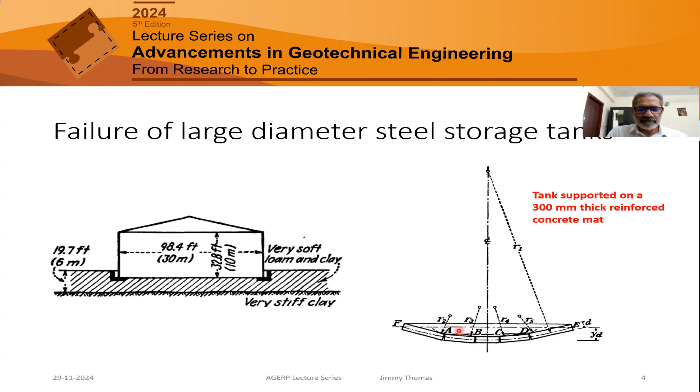Then after my masters, I did my first job. It was actually a precast piling project. They used to have precast piles which were driven, each segment about 10 meters long, for a multi-story building. The project was in a city called Kochi on the coast of the Arabian Sea. Here we have very thick deposits of soft clay, the upper maybe 10-20 meters very soft clay, then firm clay. Then at a depth of about 40 to 60 meters below ground level, there is a layer of very dense sand. So most of the multi-story buildings are supported on piles embedded in this dense sand layer.

So here, each pile is a segment of 10 meters length. It is driven with a drop hammer - there is a hammer of 4 tons weight, which is raised by around 0.5 to 1 meter and dropped. Then what happened? There were a large number of piles to be installed, and the project was running behind schedule.

Then the contractor came with a suggestion: why don't we try and speed up the driving? He said, look, the upper 10-20 meters is very soft clay, and normally we use a 0.5 to 1 meter drop height, because if you drop from a larger height, there is a possibility that piles may be damaged. So since the upper strata is very soft, why don't we use a larger height, say a drop height of 2 meters, 2.5 meters? Since the piles are being driven through soft clay, the soil resistance is less and the piles will not be damaged.

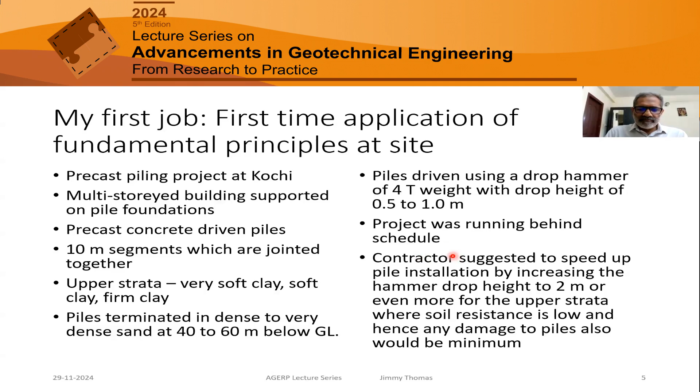But fortunately for me, I had a copy of this wonderful book, Foundation Engineering by Peck, Hanson, Thornburn, one of the classic books, where he described the process of pile driving. Nowadays most of us are aware about pile dynamics, but I am talking about something like 40 years ago. We did not have that kind of knowledge, particularly in India.

When the hammer impacts the pile, the impact travels as a stress wave down the length of the pile, as a compression wave - stresses travel longitudinally as waves. If the soil at the pile tip is hard, the wave gets reflected as a compressive wave - so always it is compression. But if the soil at the pile tip is very soft, that means if the resistance is too low, the wave may reflect as tension. In that process, if the pile experiences tension, the pile may crack. So our common sense or intuitive feeling that if the soil is soft, nothing will happen to the pile, is not correct. In fact, it is the reverse.

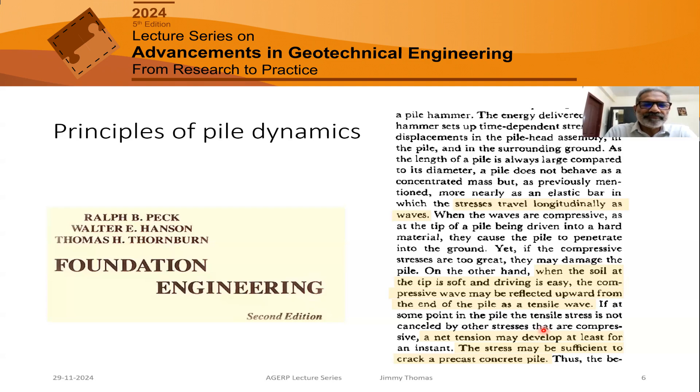I want to discuss one project which has some interesting lessons. Sometimes we have embankments constructed on soft clay, and it is common practice to use one-dimensional consolidation theory to predict the settlement.

Unfortunately, somehow people were not aware, or the budget was not sufficient to carry out ground improvement. Ideally we should have done ground improvement so that settlements are minimized, but here unfortunately nothing was done.

The client was a bit concerned - why is it settling? How much more settlement may occur? Is there an issue for the stability of the structure? So it was decided to carry out some investigation, and I was associated with that as a consultant.

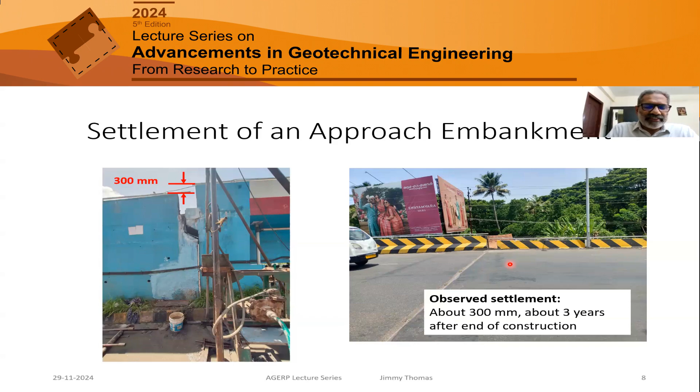Two boreholes were drilled on both sides of the approach. Here we can see at the top there is some fill and clay sand, then there is a thick, almost 12-meter thick layer of soft clay with SPT N value 2. After that it is stiff to very stiff to hard soils, then sand, etc.

Here also more or less similar - from 5.5 to 16 meters a layer of very soft clay. So by looking at it itself, we get the feeling that the settlement must have been due to the consolidation of this soft clay layer.

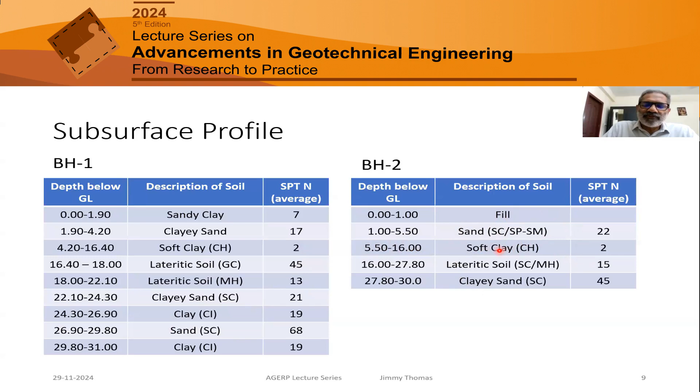From the boreholes, we did some consolidation tests. All the data was there, and we tried a settlement calculation.

Here I could realize there are some issues. One is the plan of the approach embankment - length is something like 105 meters, width is 24 meters, and there are reinforced concrete retaining walls on 3 sides. The maximum height is here, so the maximum settlement has occurred here. We have to calculate the settlement along this edge.

So is one-dimensional approach valid here? That was one doubt.

Then second is the loading - if you look at the approach, here the height is minimum and here the height is maximum. It's more like a triangular loading. So how do we manage the stress distribution?

Another question which came to mind is - the boreholes have been drilled close to this approach embankment, so the clay would have been already partially consolidated due to the stresses imposed by this embankment. So how will it affect the consolidation characteristics?

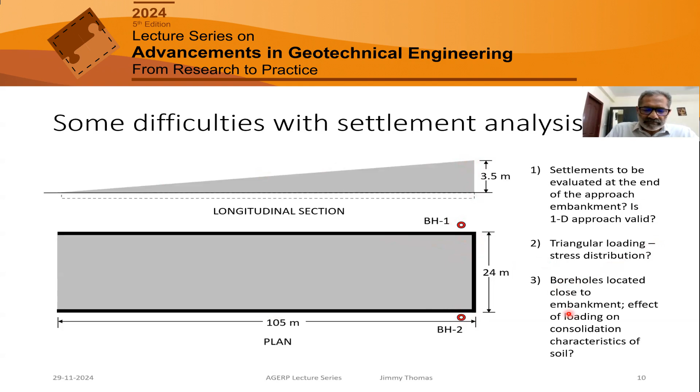Sometimes we learn much about the one-dimensional consolidation theory - all the textbooks speak about that. But sometimes, under what field conditions does one-dimensional compression actually occur?

One book has explained it very nicely - Soil Mechanics by Perloff and Baron. It's also a very old book, now I think it's not available. But when I was doing my PhD at IIT Kanpur, this book was in the library, and when I was reading through that, I found this passage. At that time, it made a very deep impression on me.

He explains very nicely under what field conditions we can apply one-dimensional consolidation theory. Sometimes we forget - whether it is a footing or a raft or embankment, we always apply one-dimensional compression theory, which is not always correct. In this case, where we have to calculate the settlement at the edge of the embankment, it is not clearly one-dimensional.

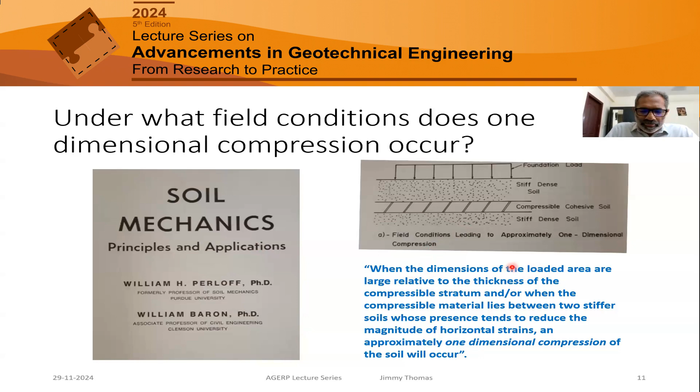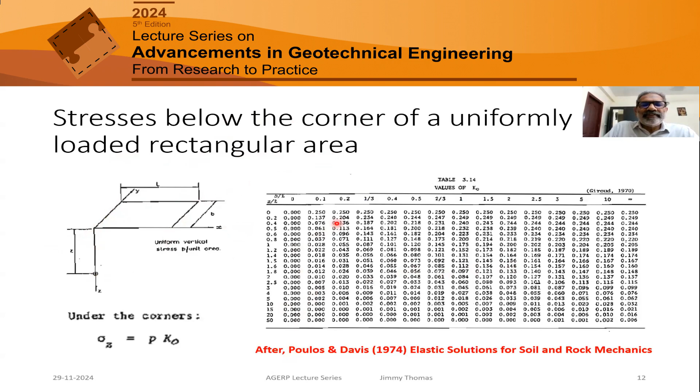Now the second part, how to calculate the stresses below the triangular loading. The book by Poulos and Davis has a lot of solutions for this. It has an equation for stresses below the corner of a uniformly loaded rectangular area. If there is a rectangular loaded area with length L and width B, and at depth Z below, it has coefficients from which we can calculate the stresses.

So what I decided: we have an approach length of 105 meters, height here is 0, height here is 3.5 meters. So I decided to divide it into 7 rectangular areas. Suppose I want to find the stress below this corner. Loaded area 1 has a length of 105 meters, width of 24 meters, and height of 0.5 meters. That gives the vertical stress.

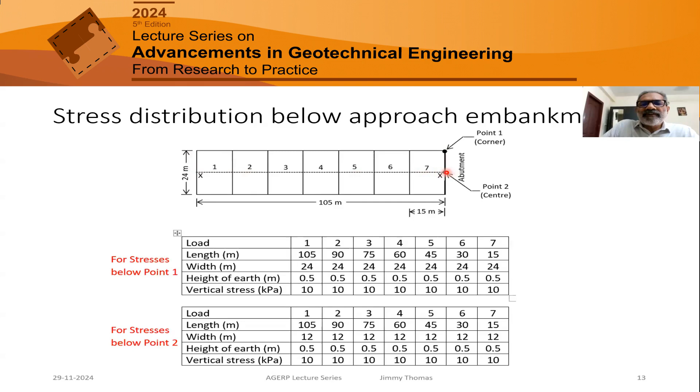Then loaded area 2 is from here to here, and so on I divided it up. Using those charts, we can find the stresses below this point. Now at this center also, I wanted to calculate the settlement, so here we consider half width. Then get the settlement, stresses below this rectangle of half width, then multiply by 2, which gives the stress below this section.

Secondly, the consolidation properties. We had about 6 undisturbed samples. Unfortunately the sampling practices were not of very high quality, because normally we have budget constraints and a tendering system whereby the company with the lowest quote gets the job. So unfortunately, in many areas, in routine jobs, the quality of sampling is not of a very high order. We have to manage with what is available.

We had 3 undisturbed samples from each borehole, then 4 samples from the upper very soft clay and 2 from the lower clay. Based on this data, these consolidation parameters were finalized.

Earlier I posed a question: what is the effect of the embankment loading on the consolidation properties? It's clear that some consolidation must have occurred, but for the calculation of settlement we have to assume that the embankment was on the undisturbed soil, then calculate settlement. So we assume the soil to be normally consolidated, and the pre-consolidation pressures were taken accordingly.

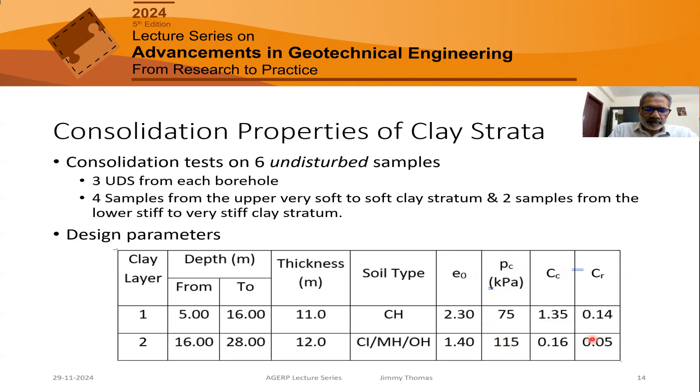The settlements were calculated at point 1 and point 2, the immediate settlement using elastic theory and the undrained modulus. Settlement here will be more because stresses are more. Please remember, the situation is not actually one dimensional, but we still used one dimensional theory because that is a very simple method, and going for more sophisticated methods would have been difficult.

So this is the total settlement. Then we have a rigid reinforced concrete wall. This would be the settlement if the embankment was completely flexible, but here it is not like that, since there are RCC retaining walls also. So we took the average settlement: average primary consolidation settlement 540 mm and average immediate settlement 90 mm.

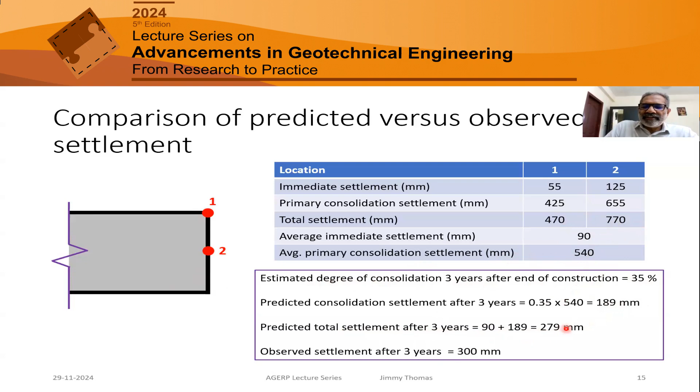Based on the CV data, the estimated degree of consolidation was 35%. So the average primary consolidation settlement is 540 into 0.35, estimated as 189 — that is the consolidation settlement at the end of 3 years. So predicted total settlement after 3 years is the immediate plus this consolidation, around 279. This matches reasonably well with the observed settlement after 3 years.

Then the client also wanted to monitor the displacements, to what extent — he was worried about what happened. So displacement monitoring was carried out for about 1 year, starting 3 years after construction, and continuing for another year.

On both sides of the retaining wall, the maximum average settlement near the abutment, where the height is maximum, was 44 mm. Near the middle, where the height is moderate, it is 37 mm. Towards the end, where the height is minimum, it is 10 mm. So a clear pattern is there: where the height is more, settlement is more, as we'd expect. On the other side, left-hand side and right-hand side differ — one side settles more.

Lateral displacements were also monitored, mostly longitudinal. Ideally we don't expect the approach to move longitudinally — there's no reason for it to move. But what happened was, readings were taken every month, and for almost 8 readings the lateral and longitudinal displacements were zero. Only the last two readings indicated some small displacement. It could possibly be an error.

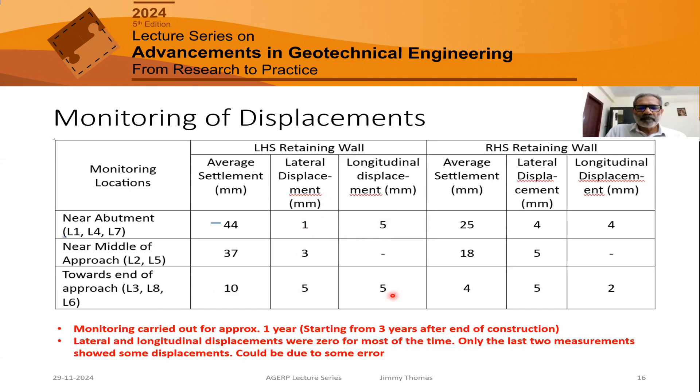So from the displacement monitoring, we could make some inferences. One is the lateral displacements were negligible, suggesting there is no risk of instability or failure. If there was a bearing capacity failure or global failure, we should expect more lateral displacements. Whereas here it is primarily vertical.

The magnitude of settlements is related to the height of the approach embankment, which is as we expect, because our hypothesis is that the settlements are due to consolidation of the soft clay layer. So where the load is more, settlement should be more.

Then settlement of the one side retaining wall was appreciably more than the other. So if you look at the CC data, compression index, that one side has got higher CC. To some extent, this could be the reason.

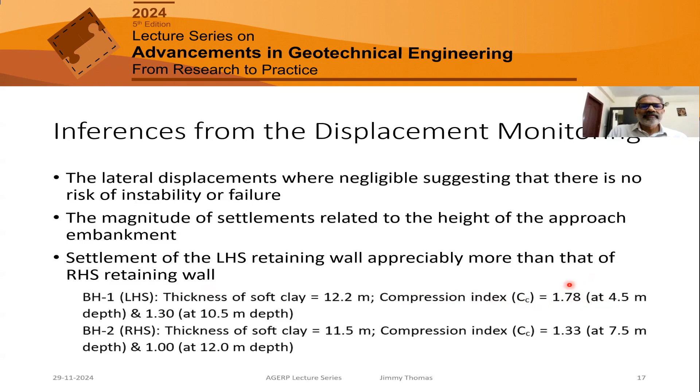Then we tried to predict the settlement after 4 years. So again, the process was repeated. From 3 to 4 years, during 1 year, what was the prediction? The prediction was something like 37 mm. Average observed settlement was around 35 mm. So that also tallies.

So now we may get a feeling that, come on, we are able to predict this reasonably accurately, and we may have a feeling of satisfaction. But there is a catch, actually. I'll come to that.

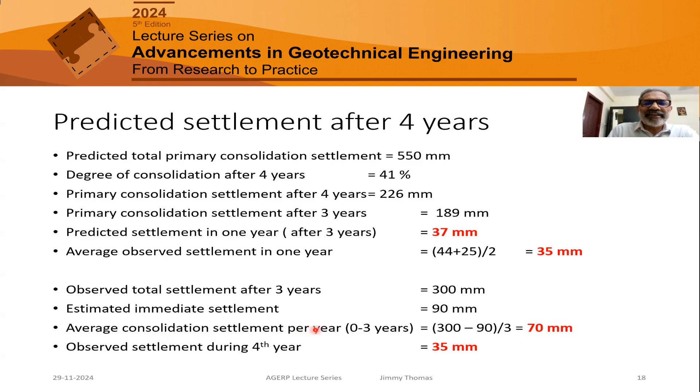Then, based on this monitoring, we made the following recommendations to the client. There is a reasonable match between predicted and observed settlement, which validates the hypothesis that the observed settlement is due to the consolidation of the soft clay.

Then deformation of the foundation strata is predominantly vertical, lateral displacements are negligible. Then the rate of settlement is indicated to decrease with time, which is what we expect if it is consolidation - the rate of settlement should decrease with time. There is no indication of instability or bearing capacity failure.

So the client's primary concern is whether there is a safety issue. Is there a risk of failure? Or should they take some immediate action? Based on our findings, there was no issue regarding stability of the retaining structures or the approach, but periodic maintenance has to be carried out.

Otherwise, when there is a differential settlement between the structure and the approach, the road quality suffers - people driving on the road will not be very happy. So that maintenance has to be done. That's all that is required.

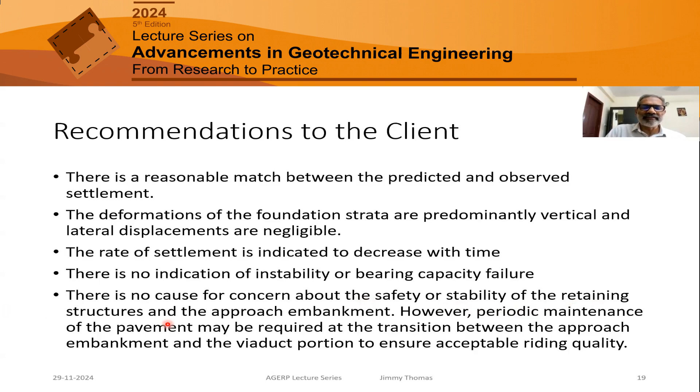Now, I was talking about the match between prediction and observation, and I told you there is a catch here. There was a very wonderful paper by Lambe - in fact it was his Rankine lecture, entitled 'Predictions in Soil Engineering,' which came out in 1973.

He classifies different types of prediction, like A, B, B1, C, C1. A is before the event - if we made a prediction before the approach was constructed, that would have been a Class A prediction, which is very, very challenging.

But what we made here was after the event. We knew that the approach had settled 300 mm. So based on that only, naturally, what do we do?

We sort of find - here's Lambe's warning, he says: however, one must be suspicious when an author uses type-C1 predictions to prove that any prediction technique is correct. So what we do is, when we do the settlement calculation, we know that we have to match that 300 mm somehow.

Normally we have a lot of parameters - we have CC, we have pre-consolidation pressure, we have e0. So we tend to fine tune the data so that the predicted value matches with the observed value. So are we cheating?

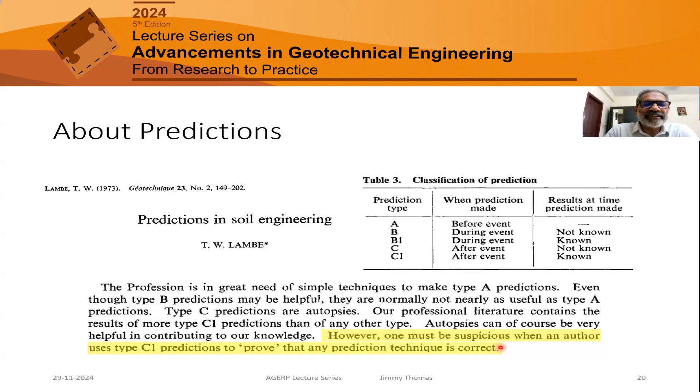Now I will come to some geotechnical design dilemmas. One of the fundamental tasks of a geotechnical engineer is: he goes to the ground, he sees a geomaterial. So the first question we have to ask is whether it is a soil, a rock, or an intermediate geomaterial, meaning materials intermediate between soil and rock, called IGMs.

Then if it is a soil, we ask, is it a sand or a clay? Sometimes it is obvious. If it is a pure sand classifying as SP or SW, we know it's a sand. And if it is a pure clay, we know it's a clay. But sometimes a material consists of 60% sand and 40% fines. Is it a sand or a clay?

We may classify it based on standards, which say if the fines are more than a certain percentage, we classify it as a clay or a sand. But how does the soil actually behave? Just because we classify it as a sand, does it behave like a sand? This is another question.

Another fundamental, the most fundamental question is: we are aware of drained and undrained conditions. We study this, but where do we use drained and where do we use undrained? Many practicing engineers want clarity on this.

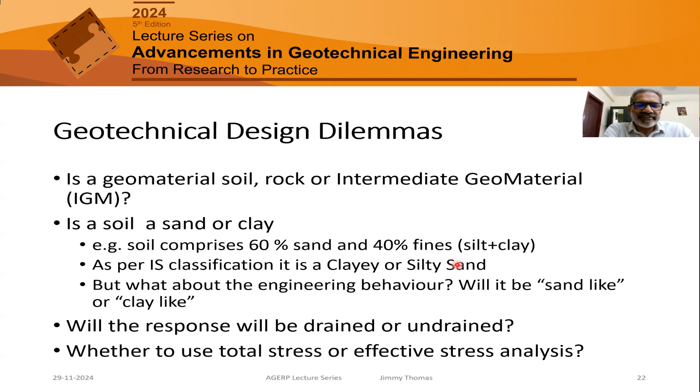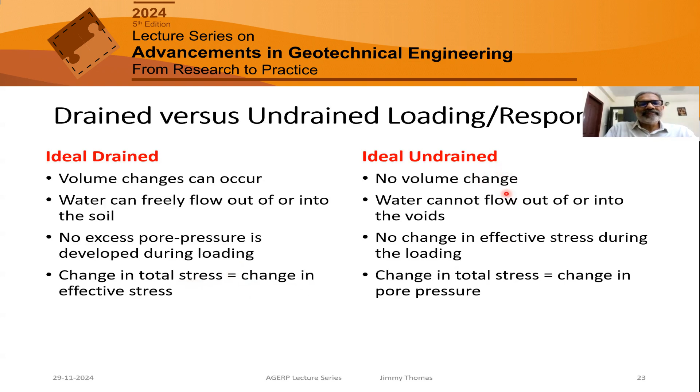There's very little practical guidance in codes and books on where to use drained versus undrained. One guideline was given by Peck, Hanson, and Thornburn: sands and gravels with coefficients of permeability greater than about 10^-4 cm/sec will, under most circumstances, undergo drained behavior. They also classify non-plastic cohesionless silt along with sands and gravels, whereas clays and plastic silts are classified as fine-grained soils that tend toward undrained behavior.

We have different systems of soil classification. In the Unified Soil Classification System and Indian Standard, if the percentage of fines is more than 50%, we classify it as a fine-grained soil, that is clay or silt. Whereas some other countries like New Zealand and Australia classify soils with fines content greater than 35% as fine-grained soils, which I feel is more rational.

If you look at the wonderful book by Mitchell and Soga, Fundamentals of Soil Behavior, they give a mathematical derivation showing that if the soil contains about 1/3 clay fraction, its behavior will be like a clay. So the New Zealand and Australian practice seems more scientific in comparison to the others.

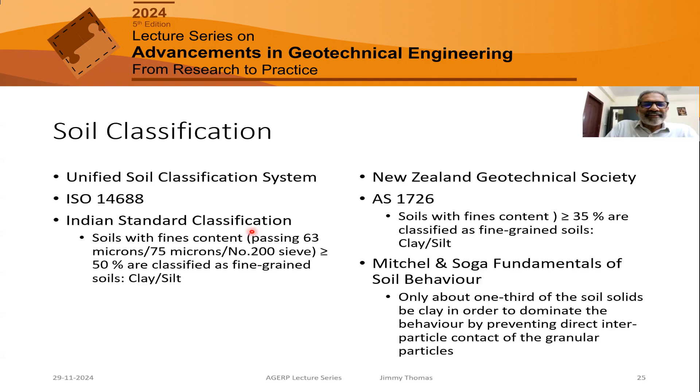So the practical implication is: if you classify the soil as a clay, its behavior is probably more undrained. Whereas if we classify it as a sand, we tend to use a drained approach. The problem is with something like 40 or 45% fines - it has silt and clay. As per Indian standard, we classify it as a sand. Does that mean we can use a drained analysis? This is where we have to be careful.

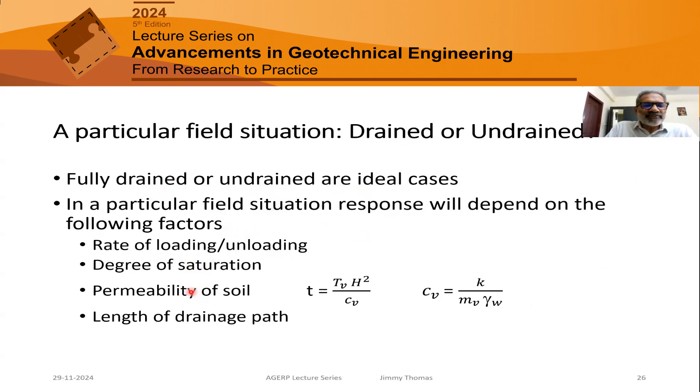So in a particular field situation, how do we decide whether to do a drained or undrained analysis? Remember, fully drained or undrained are ideal cases, so practical situations will be somewhere in between - some close to undrained, some close to drained. I've listed four factors which we should consider in deciding this: rate of loading or unloading, degree of saturation, permeability of soil, and length of drainage path.

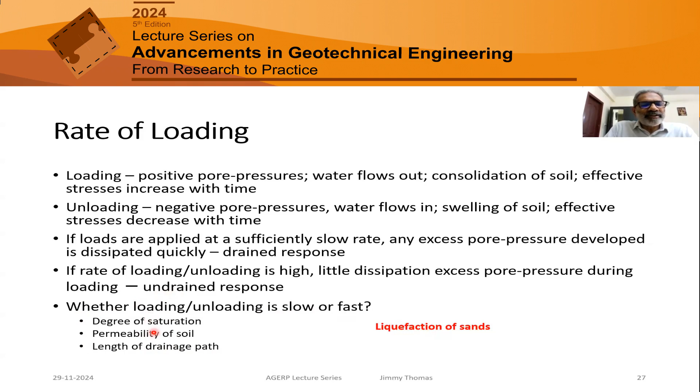Coming to rate of loading: if the loading rate is fast, it may be undrained; if slow, it tends to be drained. But slow and fast are relative, so we have to consider the other three aspects: degree of saturation, permeability, and length of drainage path. If the soil is unsaturated, there is no excess pore pressure, so we can take the response as drained. Regarding permeability, if you look at liquefaction of sands - even though sand is a highly permeable material, during an earthquake the loading is so fast that it becomes undrained.

If you look at rate of loading - I was working on a project where the soil was highly plastic silt, and the Geotechnical Investigation Agency had given the parameters as C and phi, indirectly assuming drained behavior. A friction angle of about 28 degrees was assumed, and the pile capacity was calculated. But when they did the initial load test, they found the actual capacity was much less than the predicted capacity.

I happened to look at the data and did another calculation, assuming the behavior to be undrained - that means taking the friction angle as 0 and assuming a cohesion value based on the SPT N value. Then I found I could get a number close to the actual pile load test result. So this made me realize we have to be more careful in calculating pile capacity, whether to use drained or undrained.

So if you look at the rate of loading for a routine load test, let me give an example. Suppose the working load on a pile is 1000 kilonewton. Normally we apply 1.5 times, so the test load will be 1500, and the time to reach the maximum load is say half a day. So the rate of loading is something like 3000 kilonewton per day.

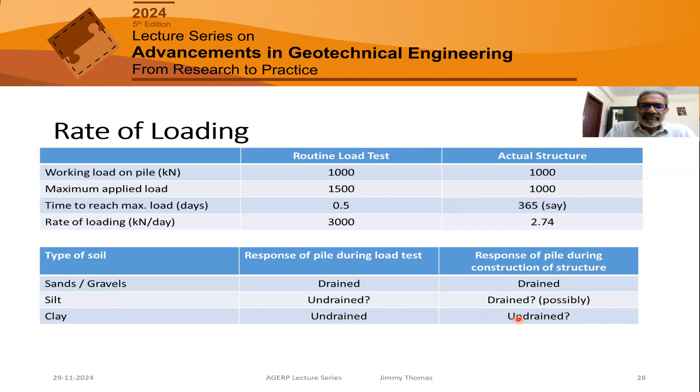Then there's the length of the drainage path. In the consolidation test, we have single drainage or double drainage, so half the thickness of the sample is the drainage path. But what happens in the actual structure? What is the region in which excess pore pressure develops? We can take the stress isobar as that area - probably something like 2 times width as the influence zone on each side. So the length of the drainage path, the maximum distance water has to travel, we can say is roughly equal to the width of the foundation.

Now if you look at a 1 meter size footing versus a 10 meter size raft, the time required for consolidation is something like 100 times more, because the time for consolidation is proportional to the square of the drainage path. So for the same situation, depending on the scenario, we have to take a call.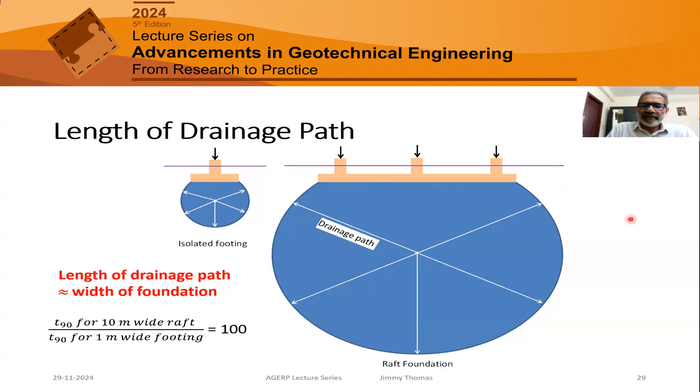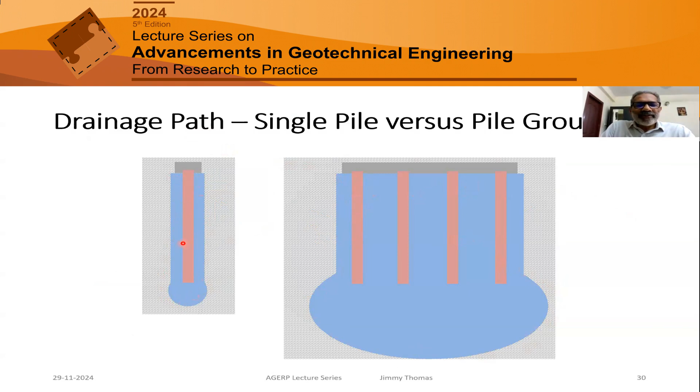Then if it is a pile - for a single pile, there's a tentative influence zone where the pore pressures will develop. Whereas if it is a pile group, it is much larger. So whether it is a single pile or a pile group, that matters a lot.

So we have to take a call considering all aspects, and it is not easy - we cannot straightforwardly say okay, if it is clay I will do undrained, if it is sand I will do drained, because we have to look at various factors.

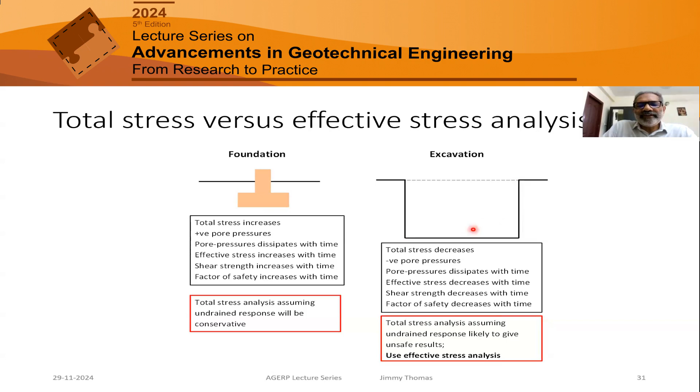And we know that somewhere we have both total stress versus effective stress analysis, so where to use total stress and where to use effective stress, again we have to be very cautious. In case of a foundation where stresses are increasing with time, if it is clay, we can do an undrained analysis - that will be conservative. But if it is an excavation where effective stresses will be decreasing with time, we cannot use an undrained analysis, that will be on the unsafe side. So there we always have to use effective stress analysis.

Similarly, like piles subjected to compressive loading, in an undrained situation we can use that approach. If it is clay, we can do an undrained approach, actually a total stress approach. Whereas if it is like a bored pile retaining wall, we have to use effective stress analysis.

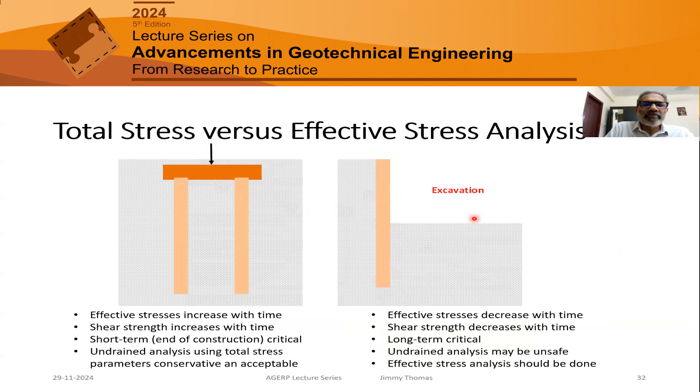Suppose we have an embankment on soft ground, with compacted fill. To decide where to use total stress or effective stress, we have to look at what happens to the effective stress with time. On the compacted fill, immediately after compaction, we know this will be unsaturated, so there will be negative pore pressure, there will be suction. So that means effective stress will be high.

But then it will be exposed to rainfall, water will infiltrate, it will get saturated, that suction will be lost, which means effective stresses will decrease with time. So for this part, I have to always use effective stress analysis. Whereas the foundation strata, soft clay, will consolidate due to the stresses imposed by the embankment, meaning effective stresses will increase with time. So at end of construction, I can use an undrained analysis. It will be conservative, actually.

So these are the kind of things a geotechnical engineer has to give thought to. Because compared to structural analysis, with materials like concrete and steel, the parameters are straightforward - we can focus more on the calculation procedure. Whereas in the case of soils, the behavior is so complex. So these are the things we have to spend time on, instead of the calculations.

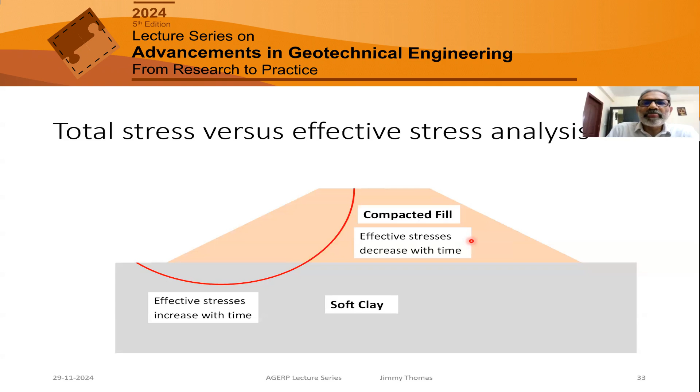So again, drained versus undrained - I've listed the various factors. In a practical situation, to evaluate all factors is not that easy. Sometimes what happens, researchers, I would say, are like surgeons - very precision work. Sometimes practicing engineers, we are like butchers - we simplify too much. Sometimes when I have a doubt, is it drained or undrained, I will say let me do both and take whichever is safer. Sometimes I do that also.

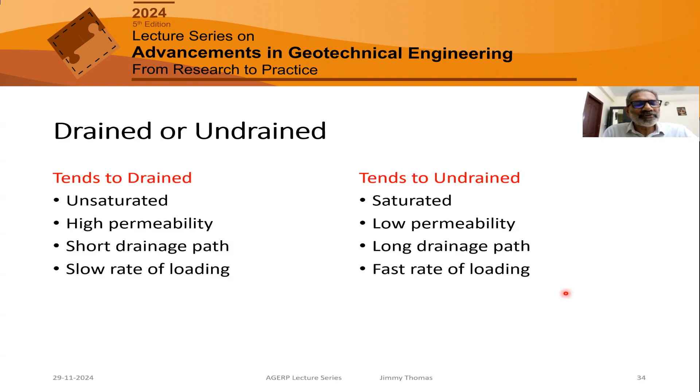So this summarizes the various points, I think I've already explained.

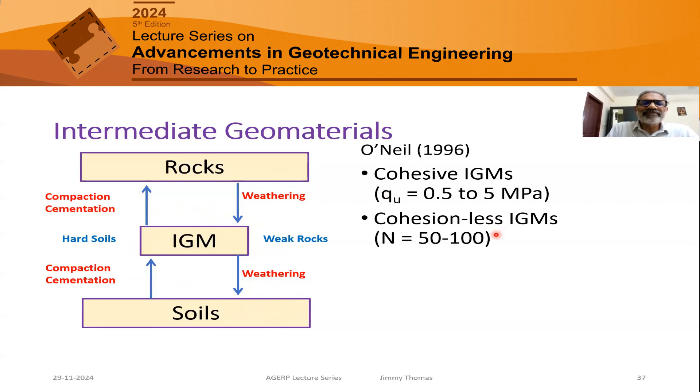Then coming to intermediate geomaterials, these are a bit tricky. In nature, we find a lot of IGM because rocks weather and become soils, and similarly soils consolidate, get cemented, and become rocks. So in between, a lot of materials are intermediate geomaterials, like hard soils and weak rocks. There is a lot of confusion in this field because some authors give cohesive IGMs and some talk about cohesionless IGMs. Whereas if you look at Indian standards, they treat IGM as a purely cohesive material, like we have IS 2911.

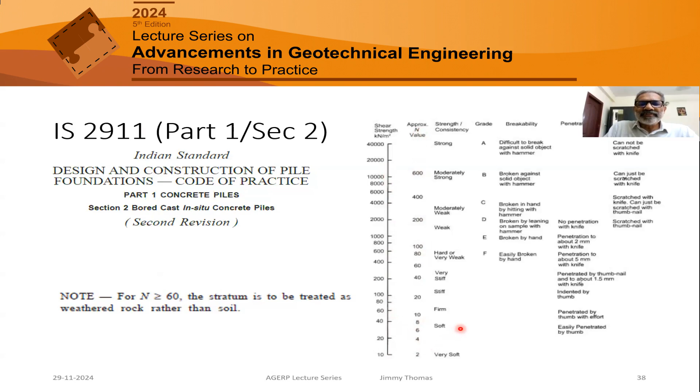So here, between the SPT N values and the shear strength, we have these correlations, which assume a purely cohesive material. We also have another standard by the Indian Roads Congress, used for the design of highway projects and bridges. So here also there is a table with N value and shear strength, implying these kinds of materials are purely cohesive.

Sometimes we have materials known as completely weathered rock, which appearance-wise looks like coarse sand only. So if you have an N value of 60, as per these guidelines, it's implied that it'll have a cohesion of something like 400 kPa. But do these materials really have that kind of effective cohesion? So we have to be a little bit careful in using this kind of guidelines.

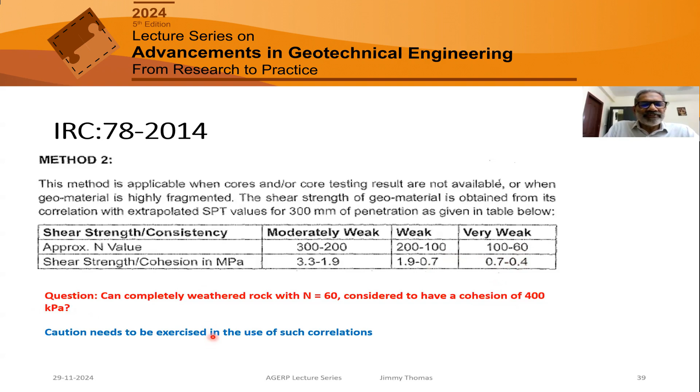So I was working on a project in India, a very prestigious project. It had two packages with two consultants working on it. In one package, where I was the design consultant, we were treating these IGMs - basically very hard residual soils and completely weathered rocks - as a purely cohesive material, because our guidelines say so. In the other package, they were treating it as a cohesionless soil, with a C of zero and a phi value of 38 degrees. Remember, same project - and the pile design was going on, the foundation design was going on, everything approved.

Nobody seemed to be worried about it, but I was a little bit concerned - come on, what is this happening?

How can in one project somebody is taking the same material as purely cohesive, and another person is treating it as purely cohesionless? So I am doing a comparison. Suppose there is 8 meters of soil, then we have one diameter pile embedded 2 meters into this intermediate geomaterial, which may be weathered rock. In one case, I take c-dash equal to 0, phi-dash equal to 38. In the other case, I use the other correlation, treating it as purely cohesive, which some Indian guidelines give, with C equal to 1300. I calculate the capacity like that.

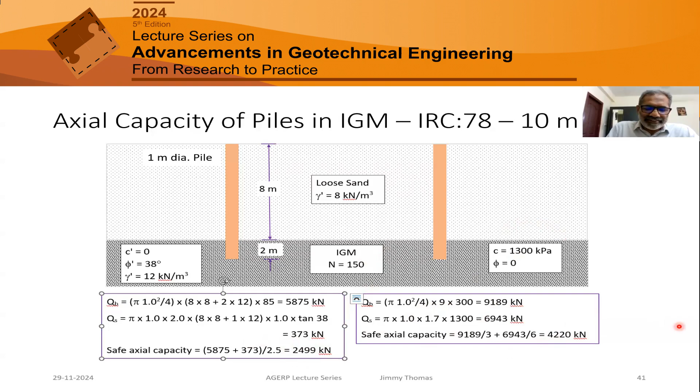Then again, residual soils - these are very tricky materials actually. One of the basic problems is we cannot get undisturbed samples from residual soils. We have to depend on field tests, and SPT is very commonly used. These are sometimes very dense, stiff materials, so static cone penetrometer may not be feasible. Pressure meter is possible, but still not that common in India. So one fundamental dilemma is we know residual soils will have some effective cohesion.

We cannot get both C-dash and phi-dash from in situ tests because suppose we do SPT - either we treat it as a purely cohesionless material and correlate phi from the N value, or we treat it as a purely cohesive material and get C from the N value. So here it is a bit difficult.

Normally design of foundations is not a major concern because fortunately these are either medium dense to dense or stiff to very stiff, so we get reasonable bearing capacity. Foundation design is not a big problem. The main challenge is in slope stability, because in foundation design, even if some cohesion is there, we can ignore it and still get reasonable bearing capacity. But when we evaluate the stability of slopes, even a small cohesion has a profound influence. So we cannot ignore it - these kinds of materials are very, very challenging.

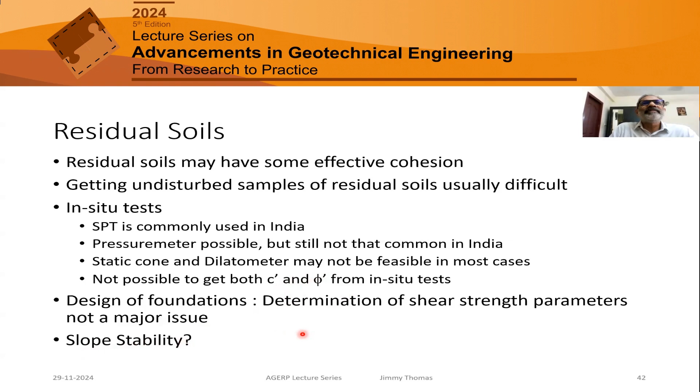And we don't know what is the solution. People recommend that the parameters should be estimated from back analysis of failures, but sometimes it's not that easy. Let me just...

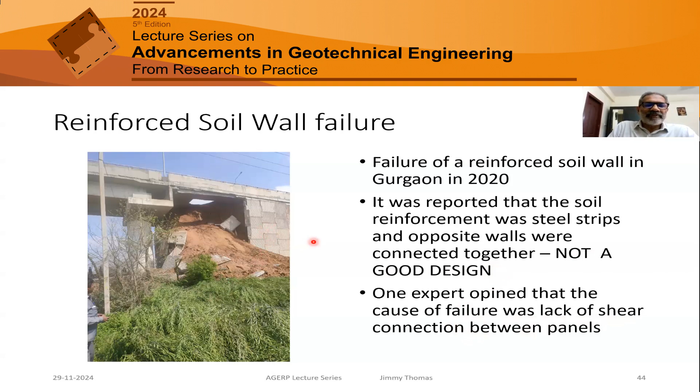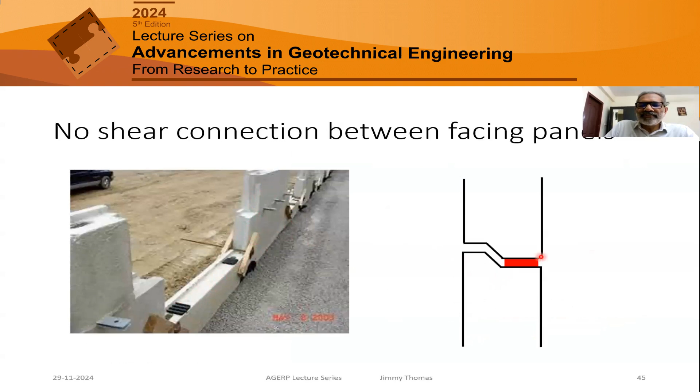But what is interesting was there was a lot of discussion, and one expert's opinion was that the cause of failure was lack of shear connection between the panels. If you look at these panels, vertically there was no connection, so he said that was the reason for failure. And it is true there is no shear connection - you can see this panel will have two elastomeric bearing pads, and the next panel will sit on top of these two bearing pad sections. So there is no shear transfer except for maybe some small friction.

Whereas in the case of small blocks, there is a shear connector actually.

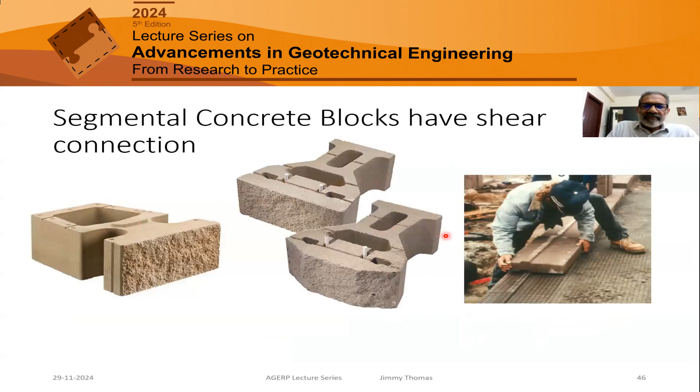What is the importance of this shear transfer? We know the reinforced soil wall is embedded into the ground, and because of that embedment it gets some benefit. When we do finite element modeling, the pressure distribution and the effect of embedment, we are very familiar with that.

But in the actual design of RE walls, we don't take advantage of the embedment—it is ignored. So if you are not taking that benefit into the design, we cannot say the failure must be due to that. And if you want to take the beneficial effect of embedment, there must be shear transfer between the panels. It must be monolithic, then only the benefits can be transferred.

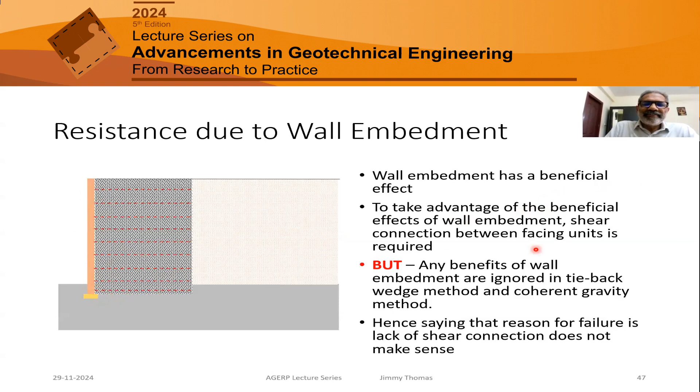So apparently that explanation of the failure was not correct, but the story does not end there.

Probably inspired by that, somebody thought the lack of shear connection between the panels was the cause of failure. So somebody proposed having an opening through the panels through which 25 dia rebars would be inserted, providing a shear connection between the panels. Practically this is very difficult and may be dangerous too—we want the panels to be a little flexible so they can adjust for differential settlement. Putting a rebar like this is not advisable.

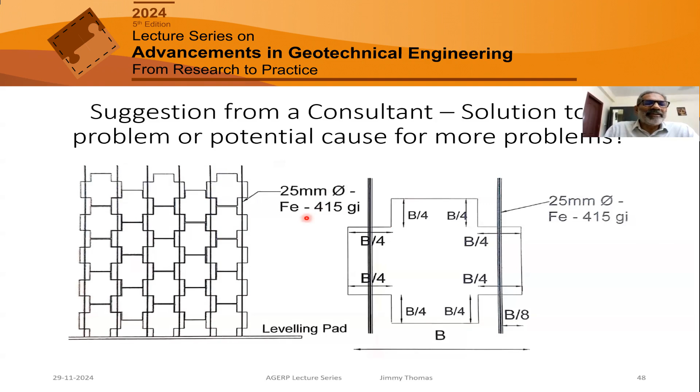And this was inspired by a wrong conjecture—somebody just thought this must be the reason. This is why experts also have to be very careful when we give our opinions, because it may influence others and lead them to a wrong path.

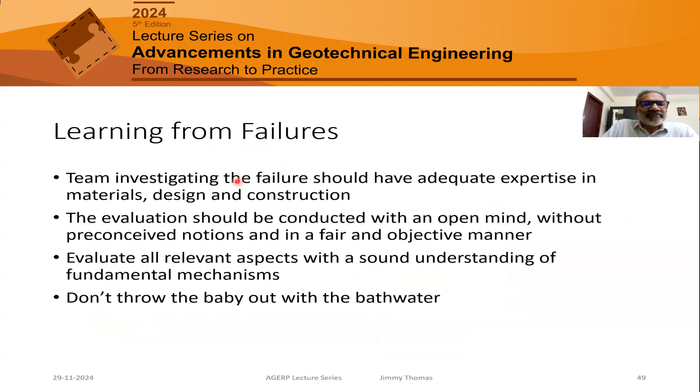Sometimes what happens is one of the issues with failures: a particular type of structure fails, and we immediately come to a hasty conclusion like this technology is not good—reinforced soil is not good, prefabricated vertical drains don't work, or soil nailing does not work. If a structure fails because of a poor design or construction, we should not blame it on the technology.

Do we have 5 more minutes? Yes, please go on. Okay, so I just want to share a very interesting experience.

Once I was visiting a site where boring was going on. The rig operator was not a very educated person, just an ordinary worker operating the rig. While talking, he asked me, is it true that the N value, the SPT N value, is equal to the SBC? I was a bit taken aback because I had never heard this before—maybe people in the geotechnical investigation industry are more familiar with it. So I told him I don't know; normally what we do is calculate cohesion or friction angle from the N value, then use the bearing capacity equations. That's the way we normally calculate it.

Then later on I came back home and started looking into this.

For fine grain soils like clays, using the Terzaghi correlation with unconfined compressive strength, the ratio of unconfined compressive strength to N is around 12. So let's assume unconfined compressive strength equals 12N in kPa. Converting to tonnes per square, it becomes 1.2N. The undrained shear strength is half of that, so 0.6N. For bearing capacity, ignoring shape and depth factors, CNc divided by a factor of safety of 3 confirms it's true—the safe bearing capacity equals the N value, where SBC is in tons per m square.

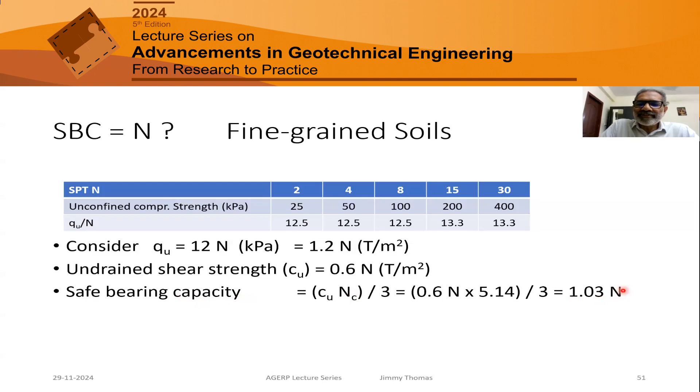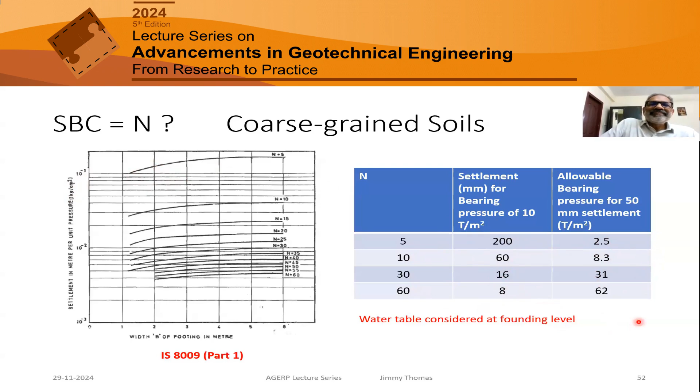So, both for clays and sands, it seems to work actually. I found this very useful.

Normally where I use this is when boring is going on at site. People do, say, 10 meters, then ask, these are the values we got, these are the strata, should we stop here or continue further? So I use this because sometimes we have to give a quick decision, we don't have time to do calculations, we may be in a meeting or traveling, so we need an immediate answer. I find this very useful. So I just estimate the column load, then assume a width of footing.

Then from the site, I would have the bore log with me, the field bore log. So I calculate the average N value within the influence zone, like 1 to 2 times the width of the footing, then use this correlation for rough SBC. If that footing size is sufficient, we can stop there. Otherwise we'll go deeper. If the loads are high and SBC is low, we may have to go to pile foundation. So I instruct them to drill further.

Then sometimes it's a quick check on SBC calculations done by others. When a calculation comes, I just check this. If there is a drastic variation, then I look deeper, I do my own calculations. If it otherwise matches, I feel okay, this must be fine.

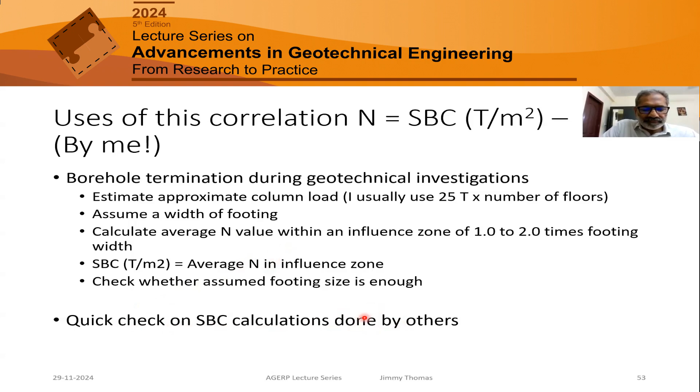But we should not oversimplify things. It's not that everywhere we use this formula, for certain kinds of use it's okay, but we know things are much more complicated. Bearing capacity is not a property of soil alone; it depends on so many things. When we design the allowable bearing pressure, we look at allowable settlement and interference between adjacent footings. So many things we have to look at.

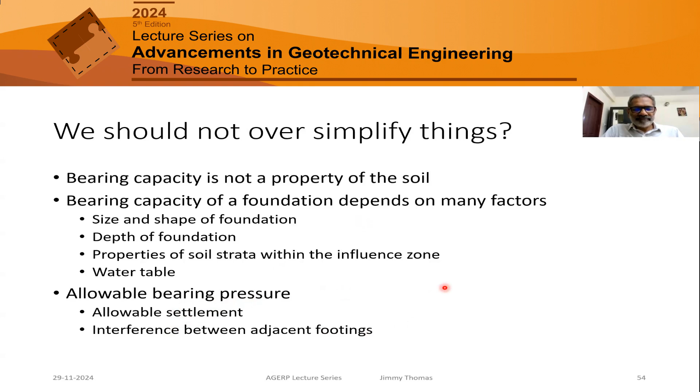And sometimes, especially as researchers, we are very fond of models and have to work with models because reality is complex. Unless we simplify, unless we idealize, we cannot analyze, we cannot have a rational solution. We have to make a habit of going to the site, because when we sit in the design office or in front of the computer terminal, we tend to have an idealized picture.

So when I was starting my career in reinforced soil, we used to have this type of connection: a concrete panel with hooks embedded, a steel bar running through it, and geogrid looped around this. Each panel has around 5 hooks in a row. When we design the hooks, we take the total load, and one of the key assumptions is that the load is equally shared by the hooks.

But one day when I went to the site, I happened to look at a panel, and found this connector bar was touching only 2 hooks. On the other 3, there was always some gap. Which means the load sharing is not equal. Then I went and looked at all the panels, it was the same everywhere. We could see that any 2 points, you can pass a straight line through, but if you have more than 2 points, unless they are perfectly aligned, they will not all touch. That was a big learning for me.

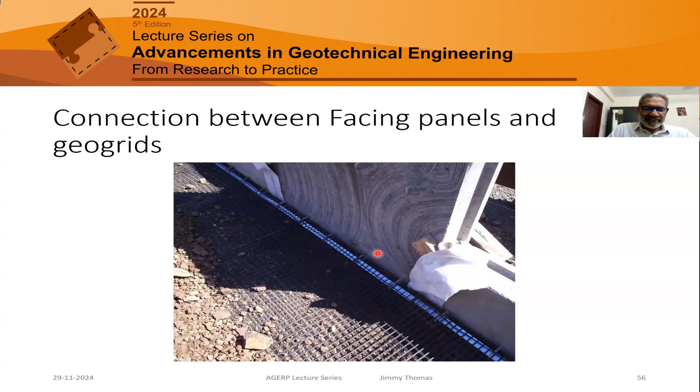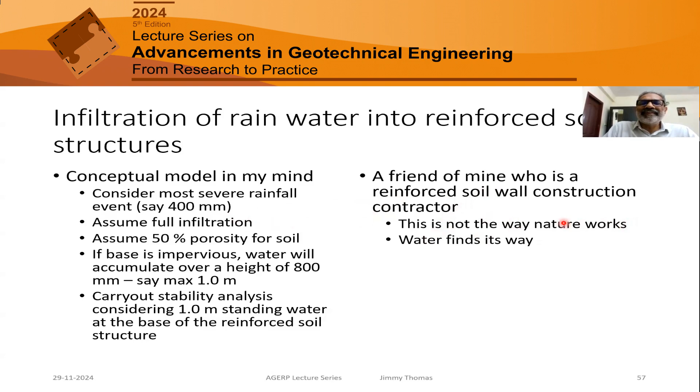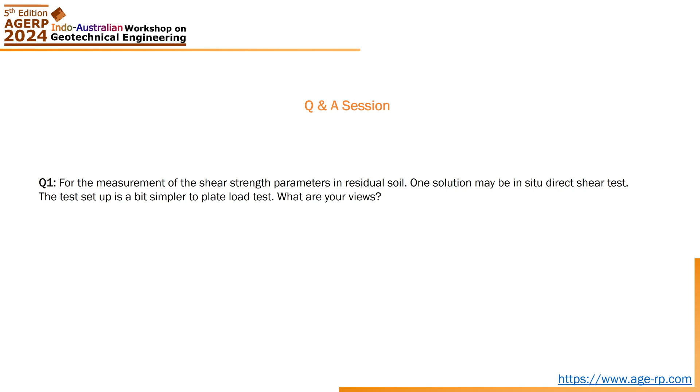Thank you. I think it's possible because in rocks also we do this, but the only problem is long-term saturation effects. Maybe it is possible, I think.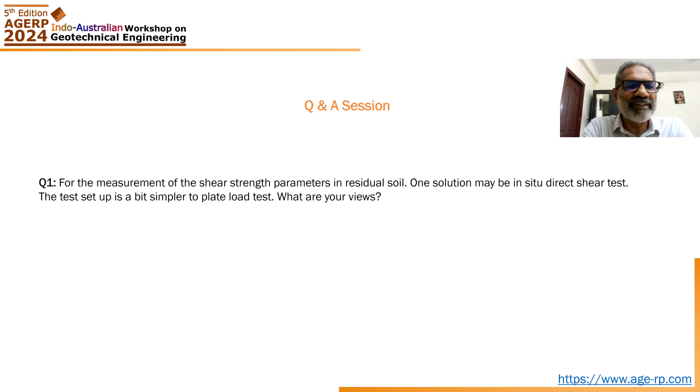I don't know whether it's about panels or blocks, because there are some blocks in which they use pins, sometimes fiberglass pins. Normally panels don't need this because each panel will have at least two layers of reinforcement, unless it's a very small height panel. Whereas in the case of blocks, we don't have reinforcements at every block, so we need a shear connection.

Normally, for very hard strata, we do 50 blows and see how much penetration occurs, then we extrapolate that number for 300 mm penetration. That's what we do. It's true that if we get 50, we can stop. But suppose for 50 blows the penetration was 100 mm, then we extrapolate it to 300 mm. The actual N value will be, sorry, 50 into 3, 150. So that's how it will be more than 50.